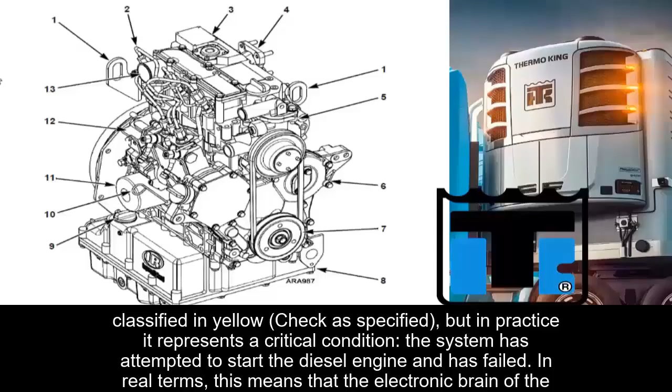The system has attempted to start the diesel engine and has failed. In real terms, this means that the electronic brain of the unit has sent the start command, but the diesel engine that drives the compressor has failed to start.

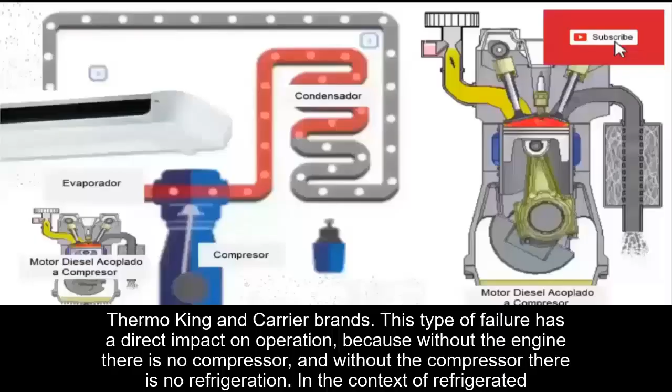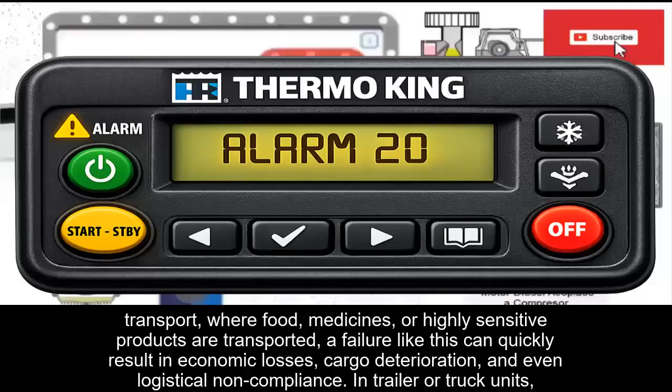This type of failure has a direct impact on operation because without the engine, there is no compressor, and without the compressor, there is no refrigeration. In the context of refrigerated transport, where food, medicines, or highly sensitive products are transported, a failure like this can quickly result in economic losses, cargo deterioration, and even logistical non-compliance.

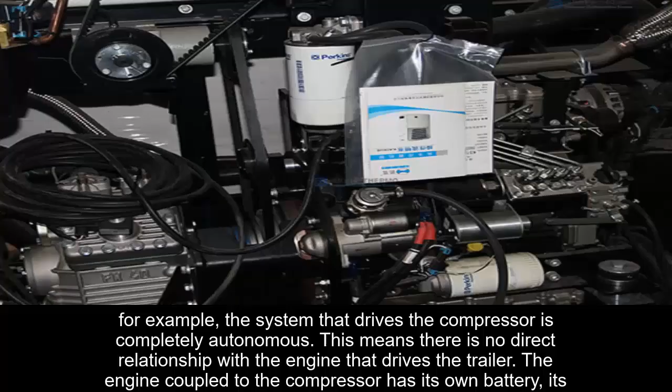In trailer or truck units, for example, the system that drives the compressor is completely autonomous. This means there is no direct relationship with the engine that drives the trailer. The engine coupled to the compressor has its own battery, its own charging system, and its own independent electric starting circuit.

From a technical point of view, Code 20 describes an incomplete sequence. The microprocessor sends the start signal, but the engine does not rotate or does not start.

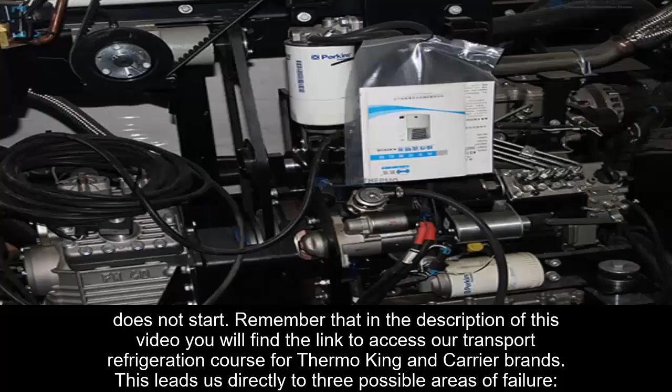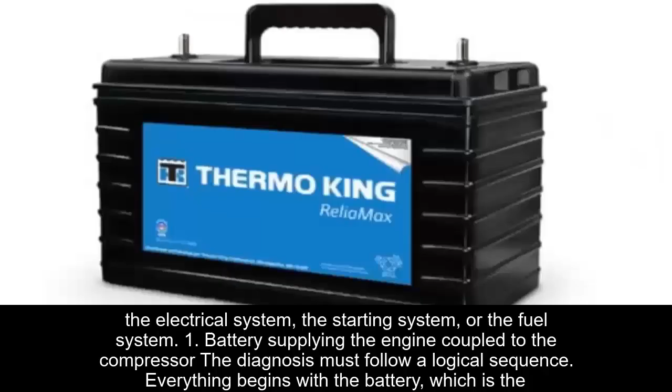This leads us directly to three possible areas of failure: the electrical system, the starting system, or the fuel system. First, the battery supplying the engine coupled to the compressor.

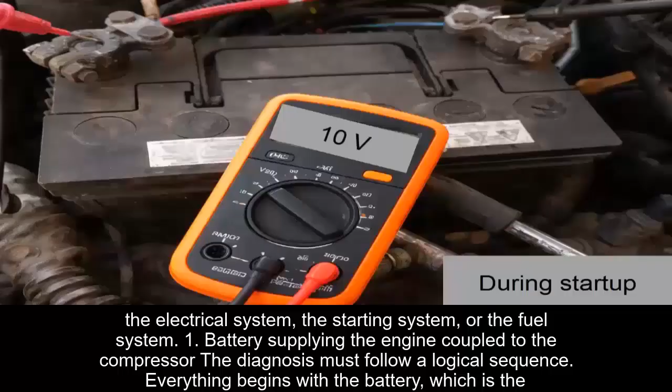The diagnosis must follow a logical sequence. Everything begins with the battery, which is the foundation of the entire process. It is not enough to measure voltage at rest; its behavior during startup must be observed. An excessive voltage drop may indicate a damaged battery or cables with high resistance.

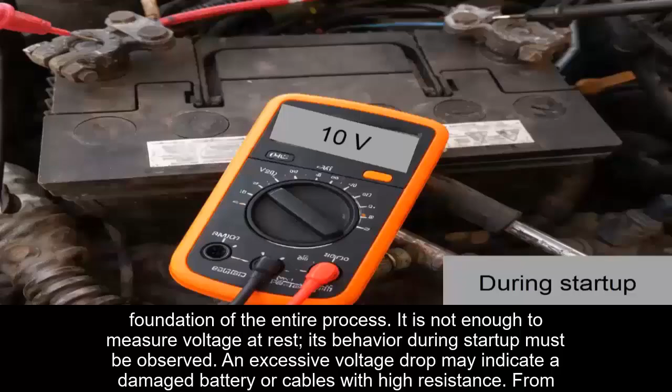From there, fuses and relays should be checked, as these components often fail silently. They may click, but not properly close the circuit.

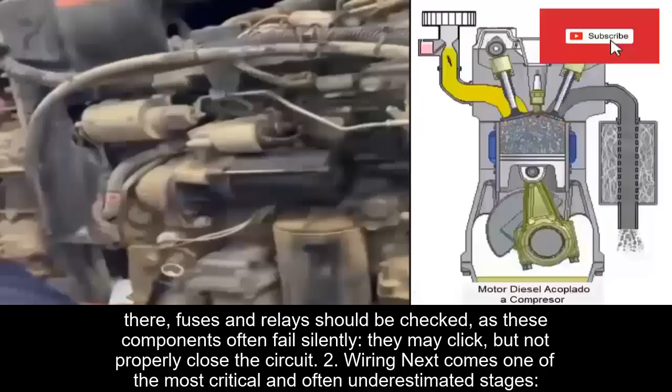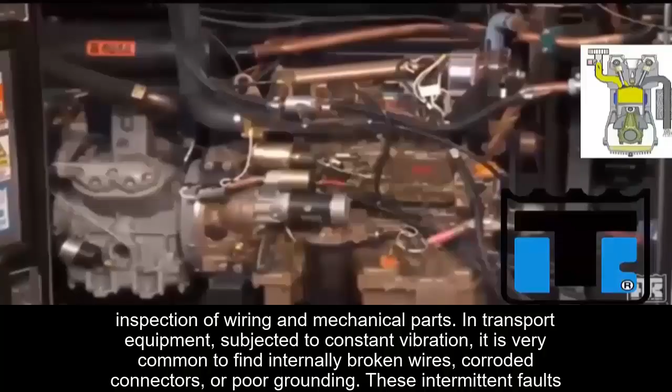Next comes one of the most critical and often underestimated stages: inspection of wiring and mechanical parts. In transport equipment, subjected to constant vibration, it is very common to find internally broken wires, corroded connectors, or poor grounding. These intermittent faults can lead to incorrect diagnoses if not carefully inspected.

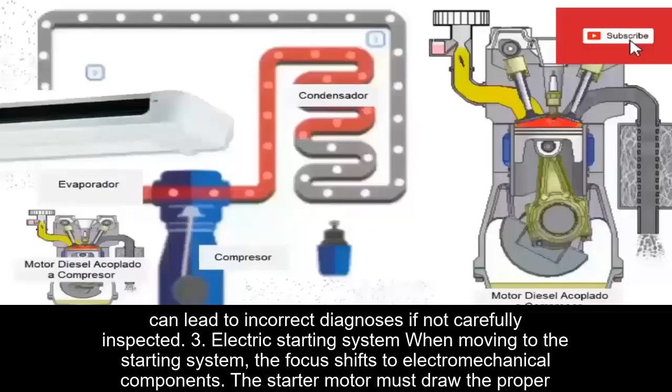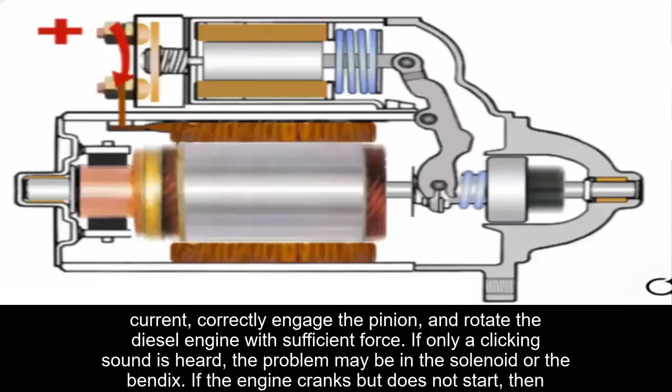Moving to the electric starting system, the focus shifts to electromechanical components. The starter motor must draw the proper current, correctly engage the pinion, and rotate the diesel engine with sufficient force. If only a clicking sound is heard, the problem may be in the solenoid or the bendix.

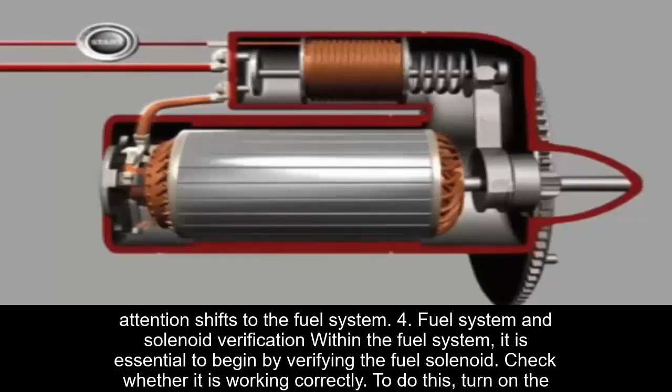If the engine cranks but does not start, then attention shifts to the fuel system. Within the fuel system, it is essential to begin by verifying the fuel solenoid. Check whether it is working correctly.

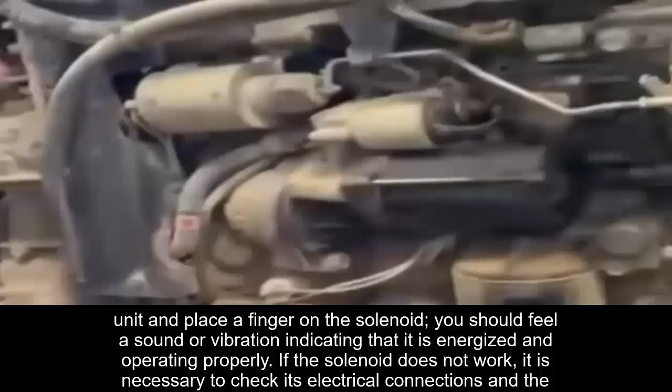To do this, turn on the unit and place your finger on the solenoid. You should feel a sound or vibration indicating that it is energized and operating properly.

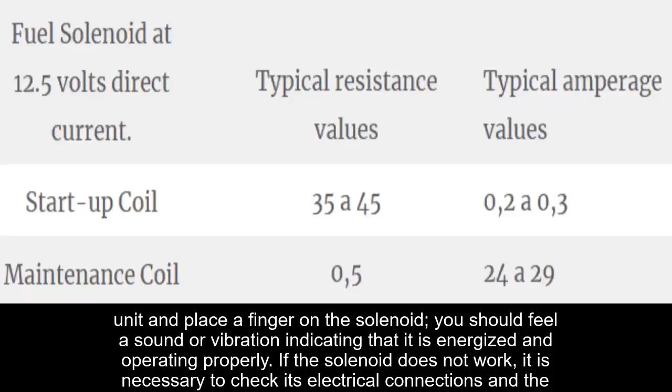If the solenoid does not work, it is necessary to check its electrical connections and the electrical components in its circuit. If the problem persists, check the inline fuel filter.

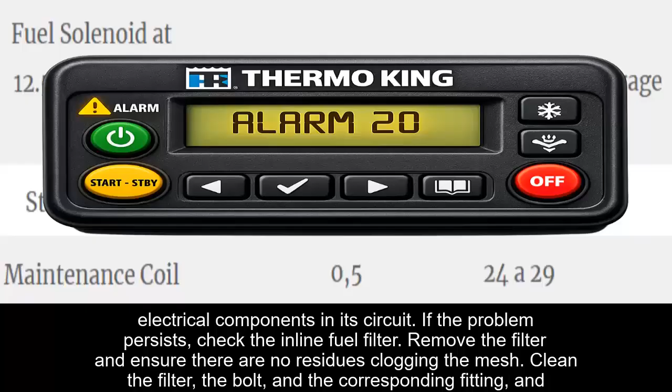Remove the filter and ensure there are no residues clogging the mesh. Clean the filter, the bolt, and the corresponding fitting, and then reinstall it or replace it if necessary.

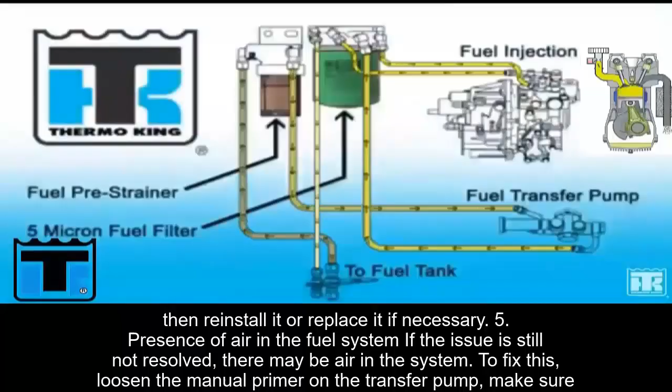If the issue is still not resolved, there may be air in the system. To fix this, loosen the manual primer on the transfer pump. Make sure the tank has sufficient fuel, pressurize the system, and bleed the air from the lines.

Finally, confirm that the return fuel flows properly back to the tank. A steady flow indicates that the system is working correctly.

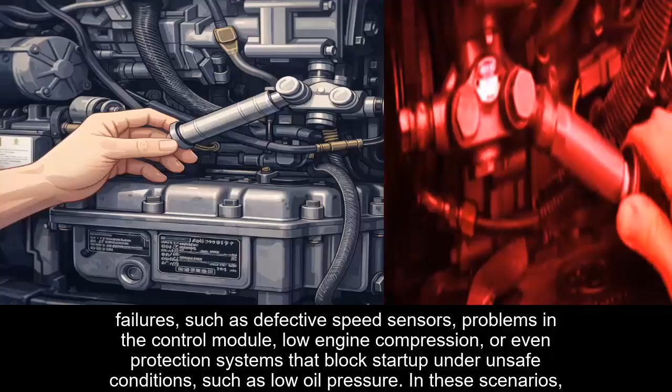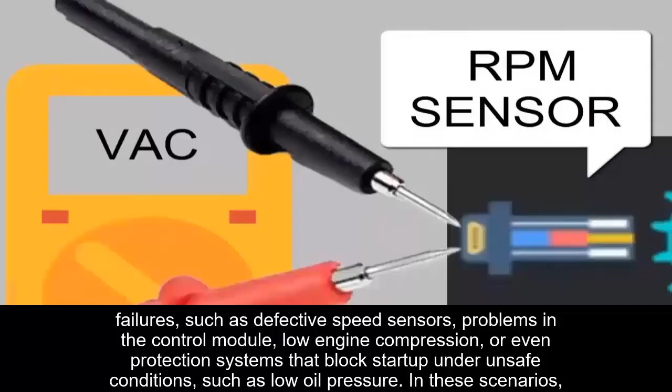However, not all diagnoses are obvious. There are more complex failures, such as defective speed sensors, problems in the control module, low engine compression, or even protection systems that block startup under unsafe conditions, such as low oil pressure. In these scenarios, the analysis must be more in-depth and supported by advanced diagnostic tools.

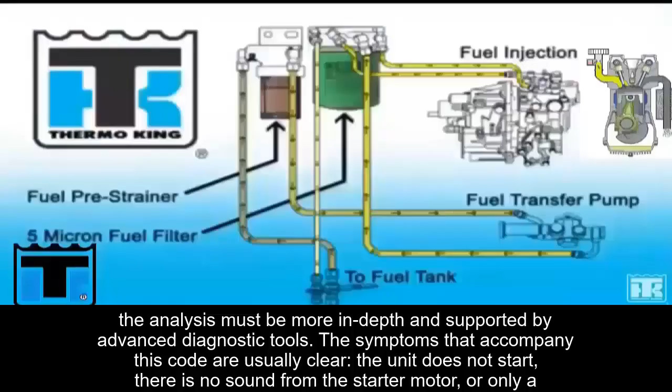The symptoms that accompany this code are usually clear. The unit does not start, there is no sound from the starter motor, or only a clicking noise is heard. In other cases, startup is intermittent, or the battery discharges quickly, accompanied by a visible drop in panel lighting.

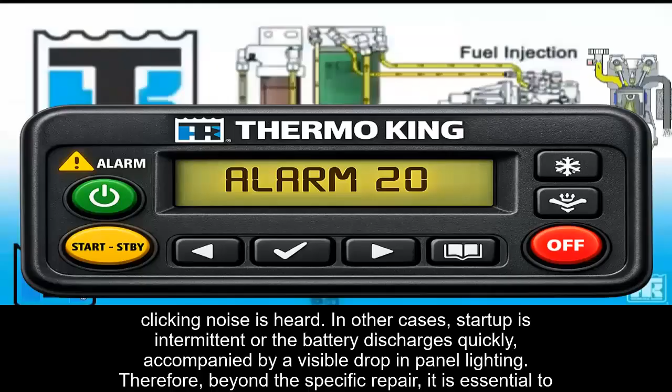Therefore, beyond the specific repair, it is essential to apply good maintenance practices. Keep batteries in good condition, check connections periodically, avoid long periods of inactivity, and ensure a clean, air-free fuel system.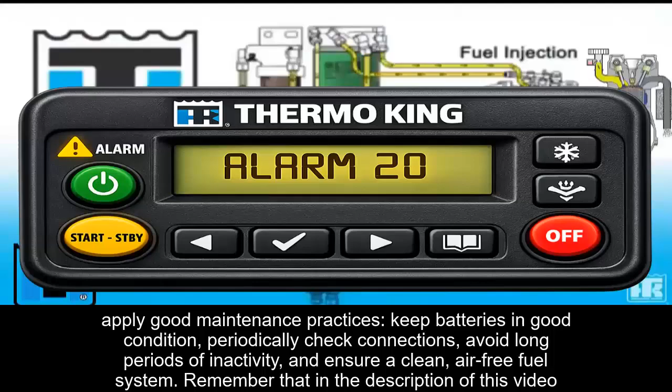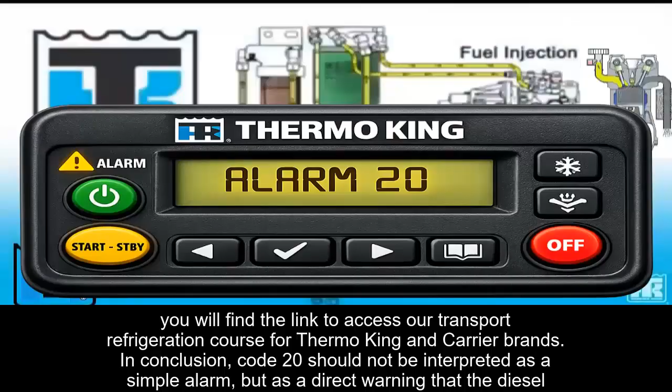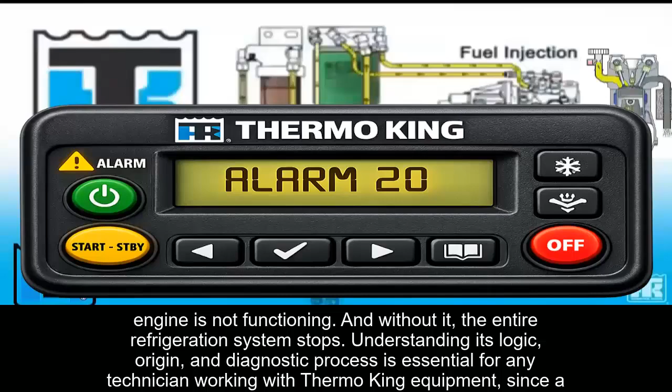In conclusion, Code 20 should not be interpreted as simply an alarm, but as a direct warning that the diesel engine is not functioning, and without it, the entire refrigeration system stops. Understanding its logic, origin, and diagnostic process is essential for any technician working with Thermo King equipment, since a fast and accurate intervention can make the difference between normal operation and significant losses.